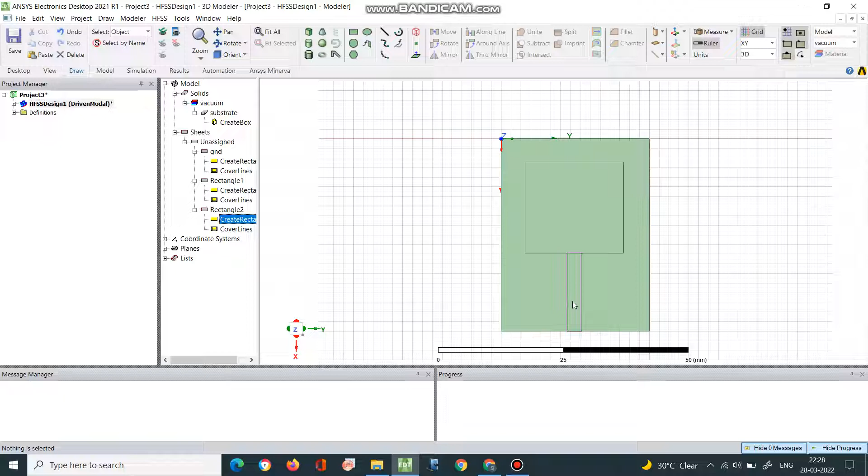Now you can see the changes here. Now the width is 3 mm. This is your microstrip line. Microstrip line is nothing but it's similar to the transmission line, which is used to carry the electromagnetic signal from the coax cable to the patch.

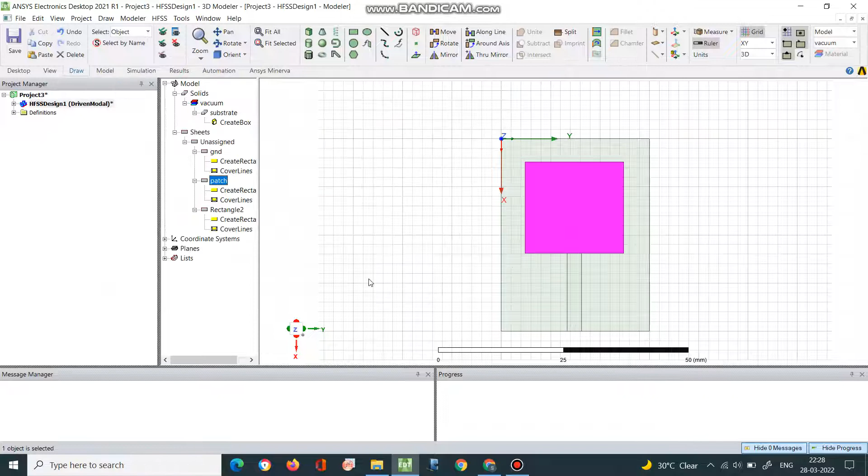So let's name this one for identification. This is my patch. And this rectangle, when you are clicking this, the particular shape is getting selected. So from that you can identify it. This rectangle is of microstrip line, named as microstrip line.

So now you can see the difference here. The microstrip line and the patch is connected here, but you have some disconnect between this. So this can be directly connected, and you can select microstrip line and use control key to hold the selection, right? Use control key to hold the selection. You select your microstrip patch also.

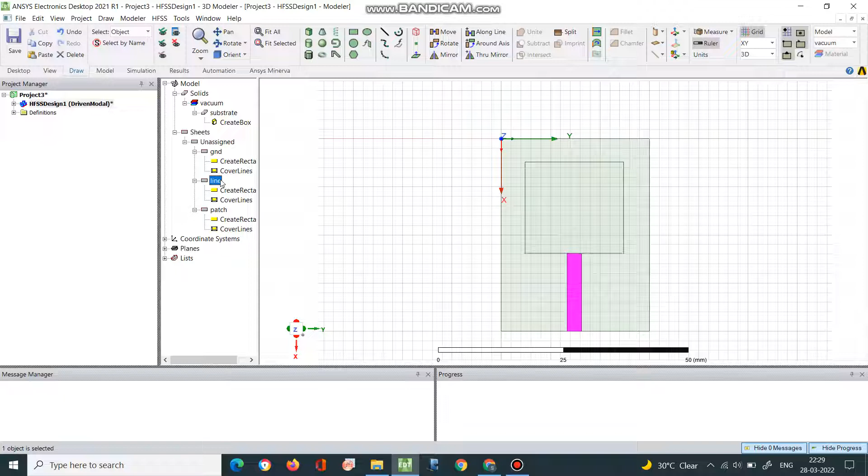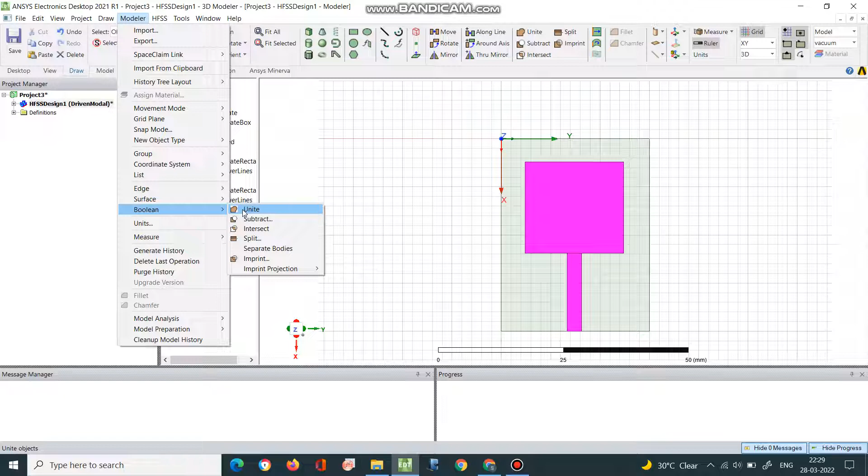So now you can see the difference. Both the structures have been selected. When both the structures are getting selected, these things will be highlighted. Unite, split, subtract, intersect, imprint, all this will be called as Boolean operations. These are getting highlighted. Or in the modeler menu, you can go to the Boolean tab, and in Boolean you have unite. So either you can use the shortcut, or here you can give unite.

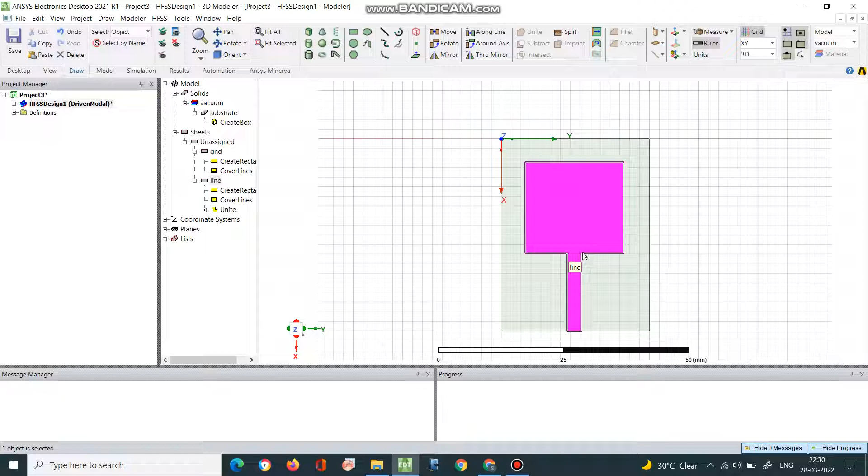So now look at this. The line between these two structures has vanished. So you can see the smooth transition from the microstrip line to patch. If any of your dimensions are changing, or if it is not in the same plane, then you cannot see this one. Right, so you will be having a mismatch, so there will be a line appearing in this structure after giving the unite also. If both are in the same plane, that is in the same Z plane, then only it will be united. The same thing for subtraction and other things also, both have to be on the same plane.

Right, so now we have completed the structure. So I have drawn the patch antenna, I have connected the transmission line also, and the basic structures I have completed. The ground has been given. This is the first step in any antenna design or microwave component design. First you draw the structure of a particular component, or draw the structure of the antenna. Once you have completed the structure, you have to assign all the boundaries and the materials.

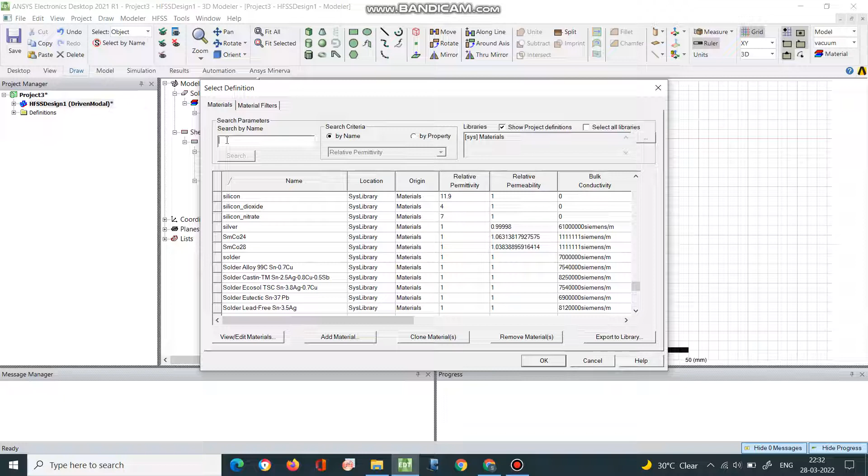In the assign material, the library will be opening here. This is the system library. So the system library will open here, and you can see the number of materials here. These are all the available materials. This can be used for either patch or for your substrate or any other purposes. So now I'm going to use the FR4 substrate. This FR4 substrate is commercially available substrate. Its cost is also less. So this is your FR4 epoxy material.

Okay. So you can also do the search by name or by property, because normally we will be selecting the substrate based on the epsilon or the relative permittivity of the material. FR4 epoxy is having the epsilon or relative permittivity as 4.4, you can see it here, 4.4. So normally we will select like that.

So substrates which have epsilon r equal to 1 in dielectric are very rare. Right, mostly the conductors will have epsilon r equal to 1, and dielectrics will be having higher relative permittivity. So we have to use the dielectric for substrate. All these things you will be studying later in your antenna theory.

So let us start here and assign the material as FR4 epoxy, give OK. Okay. So the other things, the ground and the line, are connected as both are united, and this is shown as unassigned. You cannot assign a material to this because it is not a 3-dimensional structure, it is a 2-dimensional structure. If you want to do the material assignment, you have to make some thickness. You have to increase the thickness of the sheets, then you can go for the material.

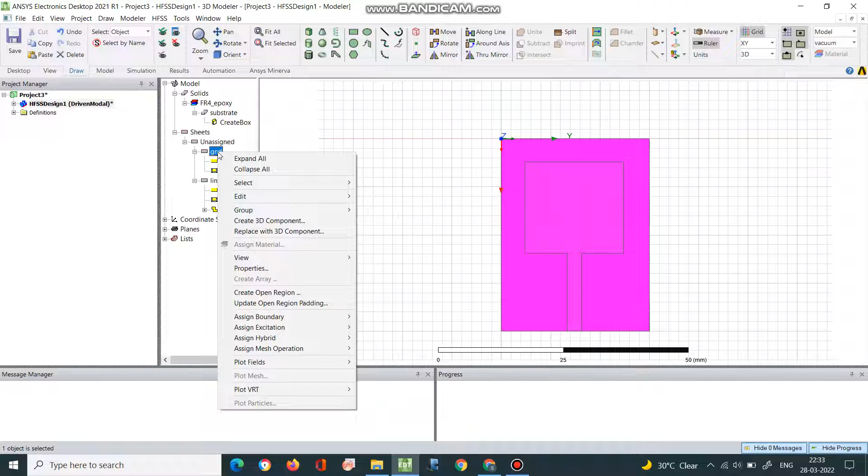Otherwise, you can assume it as a boundary, right? We can assign a boundary for this. So let us select one by one. The ground I have selected now. The ground is also a conducting material. So I'll go for assign boundary. It's a conducting material, right? So I'll be assigning finite conductivity.

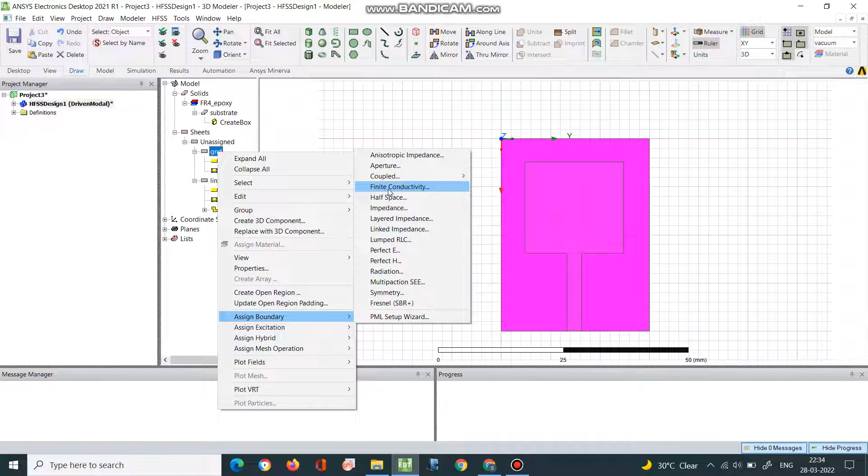Either I can go for the finite conductivity or perfect E. Perfect E is also assigning a conducting material to the boundary. Right, so either I can go for finite conductivity or perfect E. Let us go for the finite conductivity. See here, the conductivity parameter is given as 58,000,000 Siemens. So this is 58 mega Siemens, 58 into 10 to the power 6 Siemens.

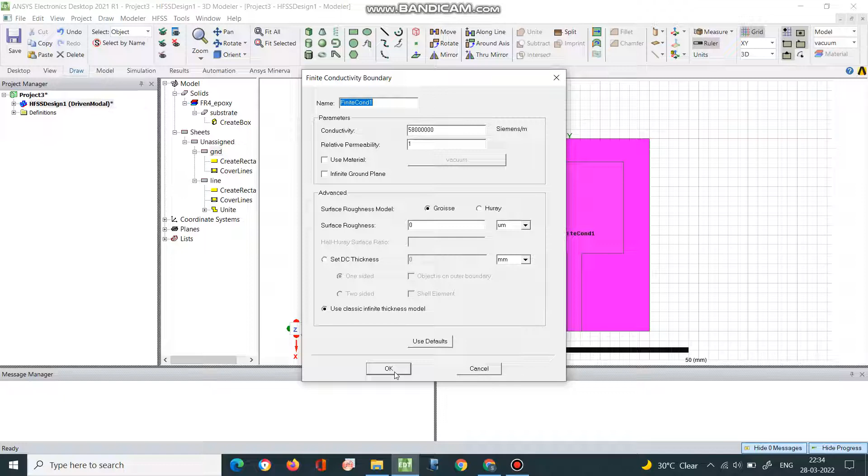Which conducting material has this 58 into 10 to the power 6 Siemens? It is copper. So you are assigning a conducting material for the ground using the finite conductivity assignment, right? So now look at this. Under sheets you have finite conductivity. Under finite conductivity your ground is assigned.

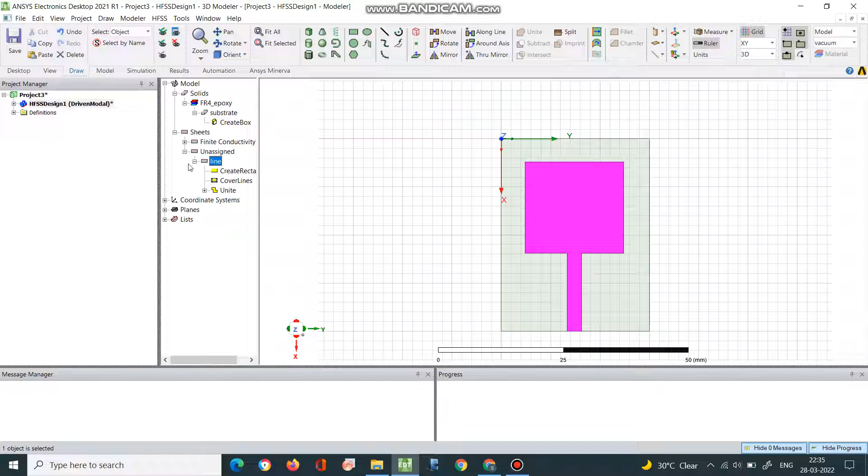Another thing is unassigned, which is your patch. The microstrip line and the patch are united. This is unassigned. Now this can also be assigned as a finite conducting material because we need only a conductor. Assign boundary, go to finite conductivity, check the conductivity as 58 mega Siemens. That is nothing but your copper. Give it as OK. So we have completed the boundary assignment. Now look at this HFSS design.

Already I have told in the initial video, first you have to complete the 3D components in the model. Here we are not using any circuit elements. If you require, you can also complete this. This is about the structuring of your antenna or microwave component, whichever you want to simulate. Next, we have completed the boundaries. We have assigned the materials also.

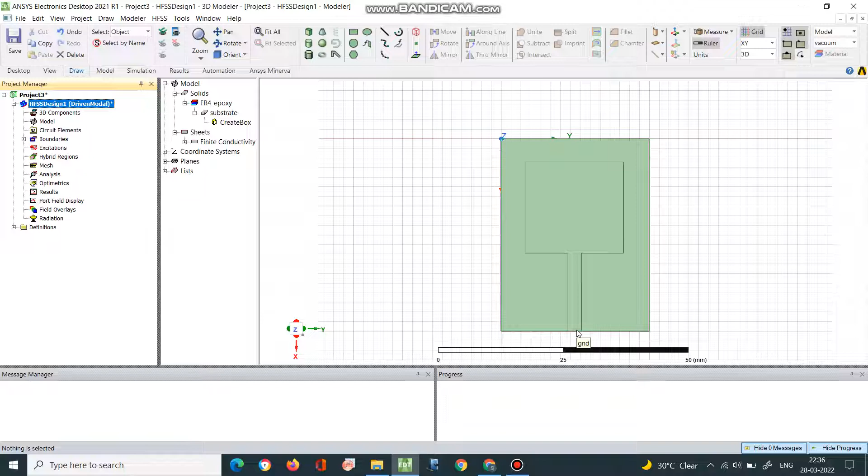And the next thing is we have to assign the excitation. Like how we give a voltage source or current source in your electronics lab, similar to that, we have to give the excitations. You have to excite through the line. This line has to be connected to the excitation or the source. So I will rotate this structure just to see this width, because I am going to connect it at this point, along the thickness of the material.

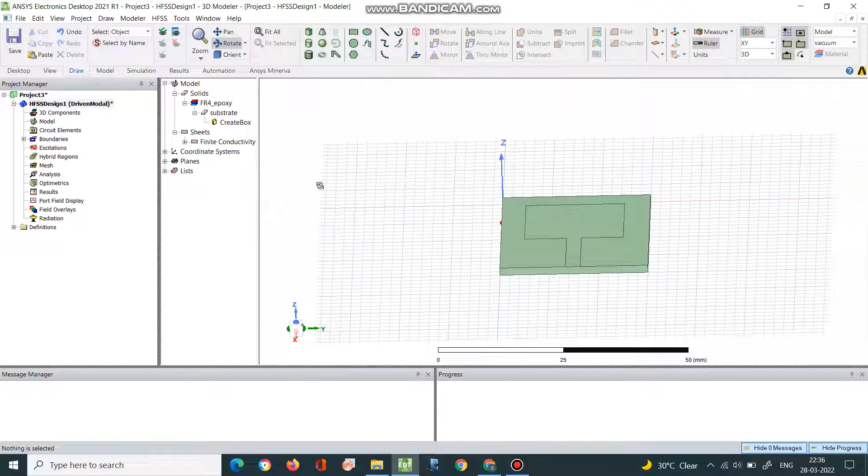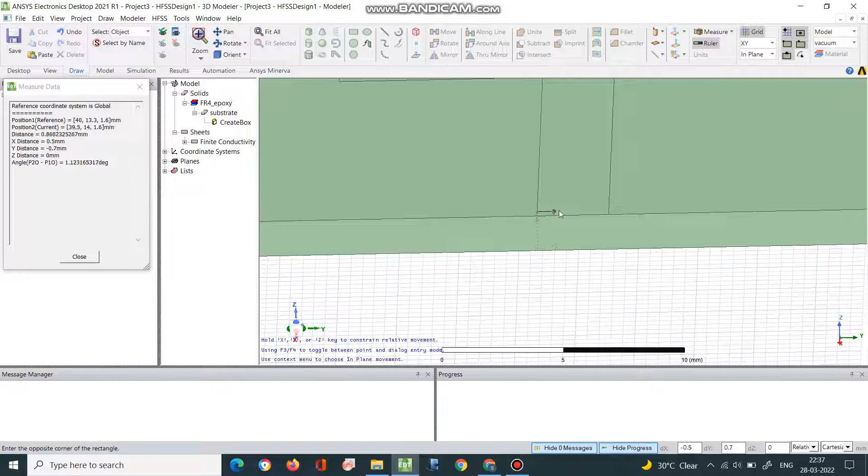Right. So I rotated it just to see this space, and now I'll be zooming this place a little wider. So here I have to assign the excitation. For this, I'll be drawing a small rectangle sheet which covers the entire length and width. So what I am trying to do now is draw the rectangle in this plane, the YZ plane.

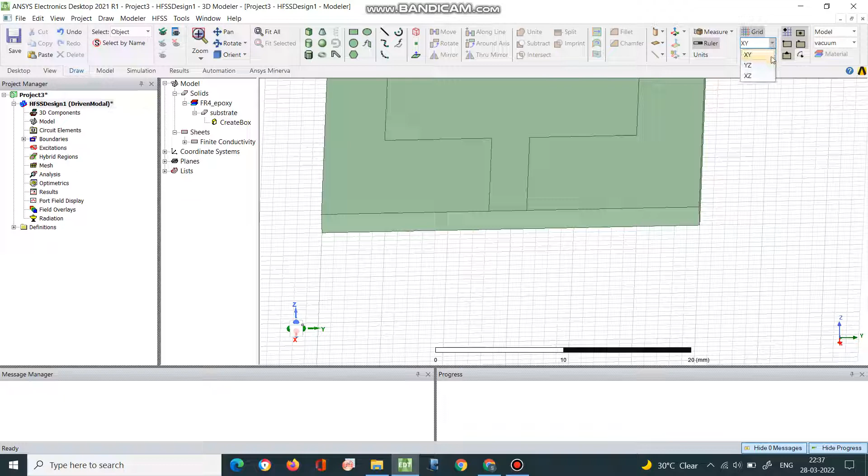Now it is in the XY plane, right? All the things you have drawn with the horizontal length as Y and vertical length as X, so in the XY plane. Now I'll be changing this to the YZ plane. In the YZ plane, I'm trying to draw the rectangle, right? So now I'll draw this.